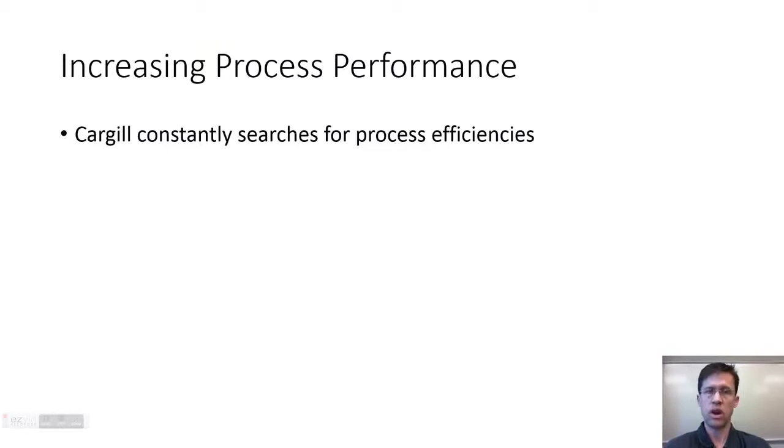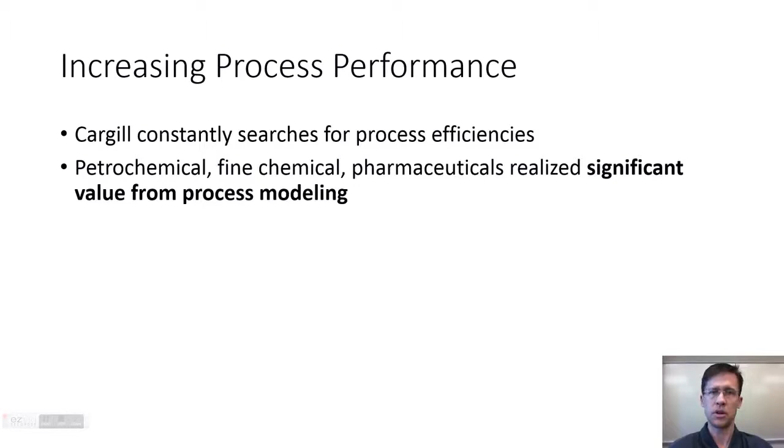Cargill is constantly on the lookout for ways to improve process efficiency. We operate in very low-margin industries. Processing efficiency is everything to us. We looked around and we've seen how other industries like petrochemical, fine chemical, pharmaceuticals have realized significant value from process modeling. We looked around, however, and found that the existing tools that were available did not translate to the agri-food space. This is for a couple of reasons.

First of all, our materials are very different. Where in petrochemical, you know the molecular description of every material you're dealing with. Here we deal with things like wheat flour or soybean meal or biomass that can change from year to year, from geography to geography, and can't be described by a single molecule. Second, our equipment, our processes are unique. We use unit operations that just aren't found in a traditional oil refinery. So we made the investment ourselves to develop our own very powerful process modeling capability. And this capability is suited to our materials, our processes.

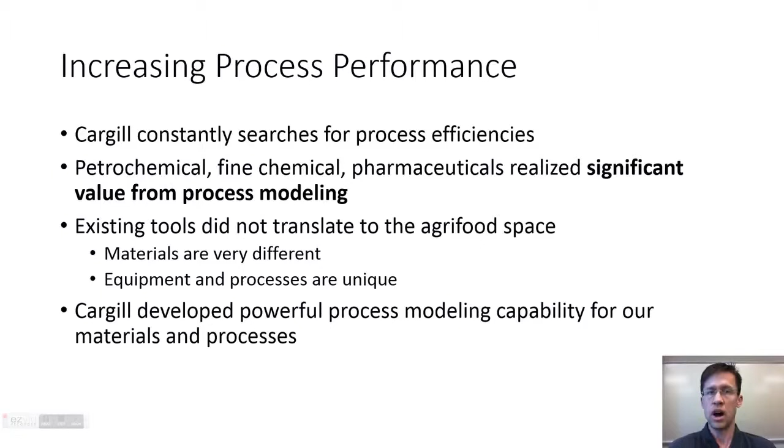So how does this capability deliver value? Well, at its most basic level, what we do is combine fundamental knowledge of our process with real data. We wrap this into a framework that gives us quantitative insight into process performance. This is the process model. I'm not talking about a statistical model with correlations. These are models built on fundamental physics of the world we live in. Mass balances, energy balances, transport equations, that sort of thing. These models let us extrapolate with confidence. They help us reconcile the data that we pulled in from real instruments that have their own sources of error.

When we've built this framework, it gives us a tool to rapidly understand process improvement ideas and what their true impact might be. It captures the impact across the entire process. Let's take the example of heat reclaim. A second heat recovery project will return value, but it will partially suppress the value of the first heat reclaim project that we did. There's less heat available for that first project to reclaim. By capturing the entire value over the whole process, we get a better idea of the payback on investments we're considering. Really, it boils down to this. We can identify and execute the right projects, find the ones that give us step change process improvement.

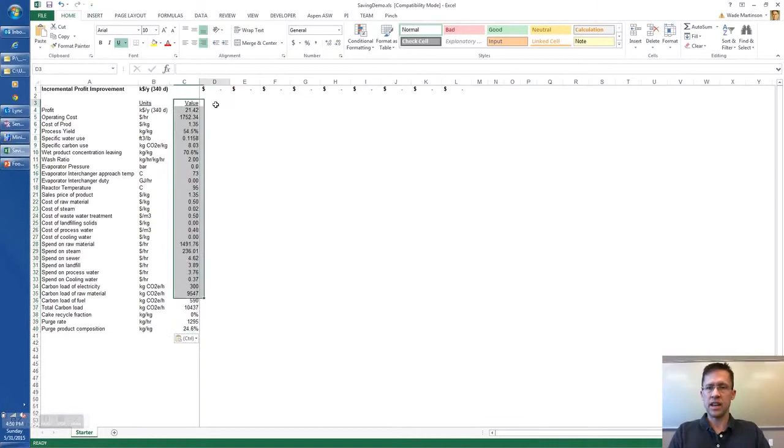Alright, so we've already talked through how we can build a process model, reconciling the data that you have, and using it to calculate and infer things that aren't directly measured. We've added on economic calculations, and we're going to take those and use them to evaluate some process improvement ideas. The first one that you can see is a trade-off that's built right into the process. In the second filter, we're washing additional product off of the cake from the first filter.

This is a diminishing return situation, however. As you use more and more water, incrementally less and less additional product is recovered. All that water has to be evaporated, and that takes steam. That takes gas or coal, biomass. Regardless, it has a cost associated with it that just keeps climbing as you use more and more water.

Now, when the process was built, there was a certain set of costs for the raw materials and fuels that you use, a certain cost for the steel, the capital to build the process, and a certain sale price for the product. So at that time, there was a certain optimal wash ratio. That may have been a long time ago. Things may have changed. It may be worth revisiting that ratio between the amount of water that you use and amount of cake that you're washing. So let's take a look.

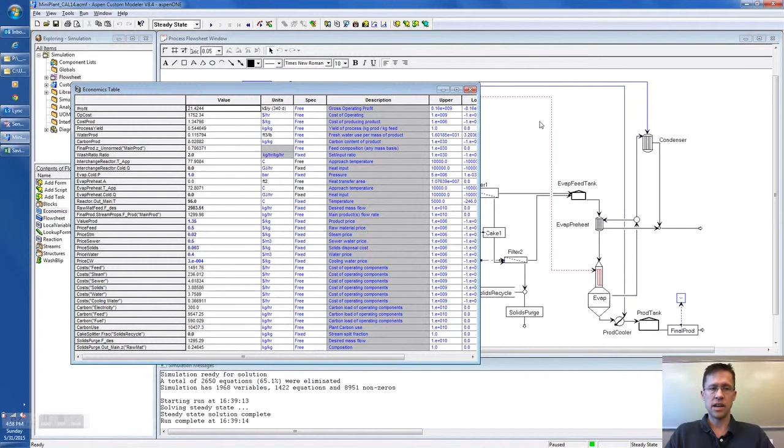I'm going to switch back to the economic summary table that I built. We see right now we're at about $20,000 or euros per year generated from this facility. Let's see what kind of impact we can have if we change that wash ratio. Right now it's 2 to 1. What if we made it 1 to 1? Let's take a look. Click of a button, we run that through the model. I'm going to take this over to Excel. I've formatted Excel to show things that improve with green, things that get worse in red.

We see at the top, yes, it could be very worthwhile, incremental value of about $210,000 per year from changing the wash ratio down from 2 to 1. We look at what gets changed. Our first red here is on yield. We are giving up a little yield. We're using less wash water. However, in this case, we spend much less on steam, and the savings on steam more than outweighs the small incremental loss in yield.

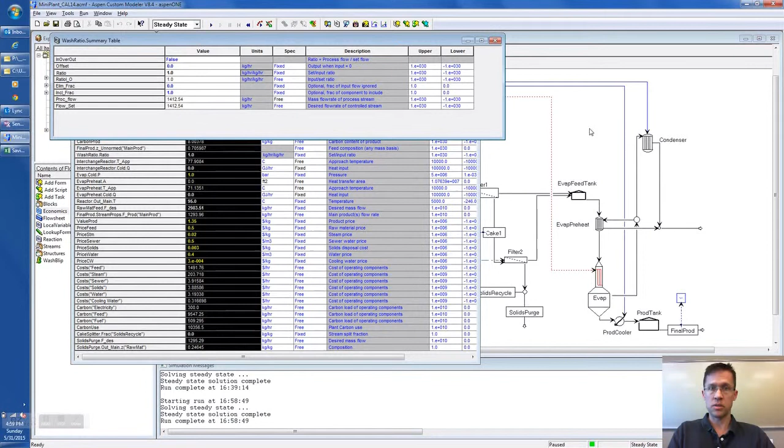So let's go back. Why not, since this is math at this point, it's a process model, let's use it. Let's make it an optimization and find the best wash ratio, the one that maximizes the profit that we can make here. And we see, actually we can go even farther. Instead of 2 to 1, if we go nearly to 1 to 2, flip it around, we've improved things even more. I'm going to paste it in here. Then I'm going to read it. I know this isn't readable from the screen. Incremental value is about $250,000 per year. That is definitely worth exploring.

Now, this isn't to say that just because the model says so, run out and do it. But it says, hey, is it interesting for $250,000 to take a closer look at how much water is used on that recovery filter? Do we need to do a management of change? Do we need to dig into this further or not? If it had been $4, we'd probably say forget about it. But $250,000, that's significant. We might want to pursue that further.

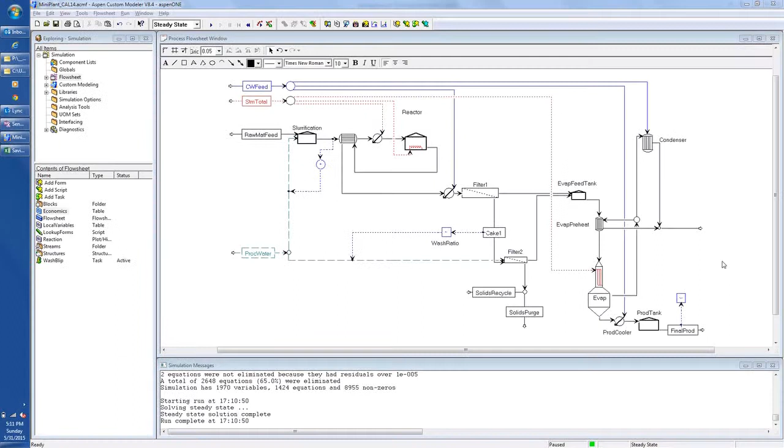Alright, we've used the model to examine how a change in the way we operate the recovery filter can have a significant effect on the overall economics of the process. We can use the model to look at more fundamental changes, however, actual changes to the layout, the equipment used, the configuration of the process itself.

Let's take a look at how water is used in this process. We use a lot of water. We use it to slurry up the raw material, we use it to wash the filter cake, and then we have to evaporate it back off. What if we were able to reuse some of that water? So let's do the what if using the model.

What if we were able to reuse that water that we've evaporated, take the condensate, and use it to slurry up new raw material? So I'm just going to reconnect that stream, easy in the model. And let's see how this influences the economics of our process. Again, we run the mass energy balances. This type of model lets us extrapolate, evaluate these kind of changes. Go to our economics table and compare it in Excel.

So before we had achieved on paper about a $250,000 incremental improvement. It looks like by reusing condensate, even after we've optimized the wash water that we apply to the recovery filter, there's another $115,000 on the table for a total between the two projects of $365,000 potential increase in value.

Again, this isn't to say that we just run out, call up a contractor and start making piping changes, but it says two things. One, there might be a significant amount of money on the table, again, if we were a little bit smarter about our water and tried to reuse some of it for our raw material slurry. Interestingly enough, it's often tough to justify water projects just on the basis of water savings. And here, that's not really the value.

The model lets us dig in a little bit. What gets better? Our specific water use is this highlighted row. Sure, that's gotten a little bit better. Our spend on water has decreased just incrementally about $300. That's all the savings, $300 per year.

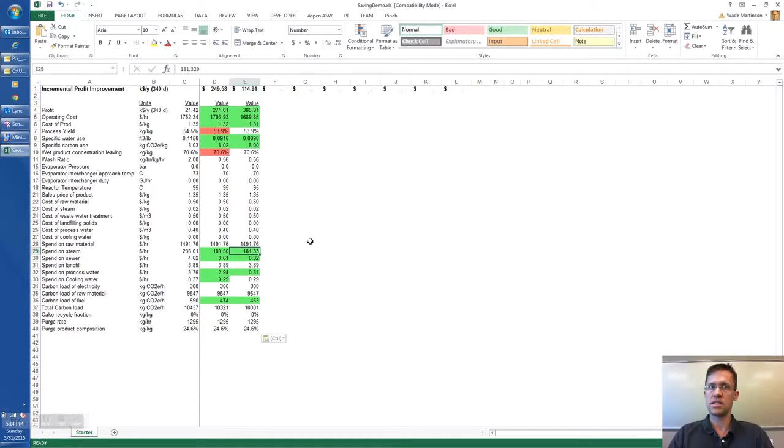The savings comes in the energy that's contained in that water. That's where the value lies. You wouldn't justify this water project on the basis of water savings. You justify it on the basis of the energy that you save by reusing that hot condensate. So second point, again, it's what I mentioned before. It's not to say run out and do it, but is $115,000 worth exploring to add it to our project? It's definitely worth a look.

The model also has captured interactions. Now we're talking about making two changes. We're talking about using the water differently and taking it from a different source. Those projects could have some interactions. You don't want to overpromise by looking at them individually, adding the value, and saying this is what we get when we do both. Using the model like this captures the interactions across the whole process and lets you make better choices about your final scope of project.

So I don't want to talk too long here. Hopefully that gives you a feel for the many different ways that we can use a process model to help us really accelerate our process improvement efforts. We can look at changes in the way we operate. We can look at changes in the way the process is configured. We can look at additional things, startup and shutdown transition type behavior. We can even use this to examine schedule impacts on overall cost. This type of stuff and more.